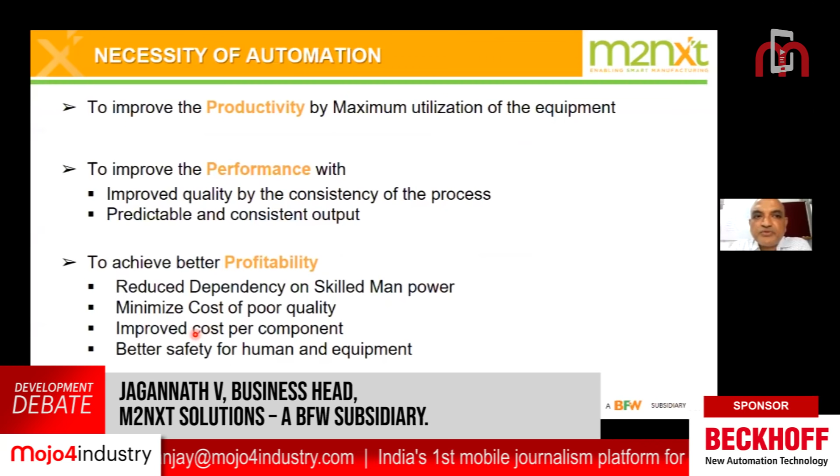So what is the real meaning and necessity of automation? The first and foremost is to improve productivity by maximum utilization of the equipment, so that the OEE of the equipment is at its peak, at its optimal level.

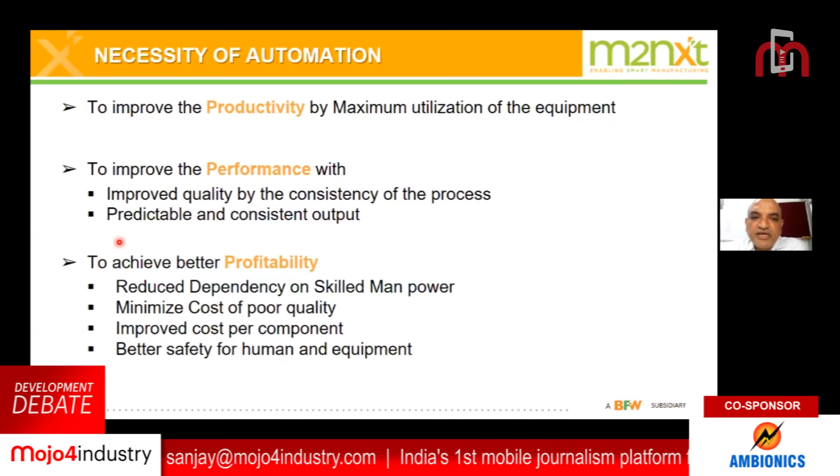Next is to improve performance with improved quality by consistency of the process, predictable and consistent output, so that you know for sure what the output would be, what you would get from the shop floor when you automate, so there is no ambiguity or surprises in terms of deliverables from the shop floor.

Third, as a result of productivity and performance, is to achieve better profitability, which means reduced dependency on skilled manpower, minimized cost of poor quality, improved cost per component, and better safety for human and equipment.

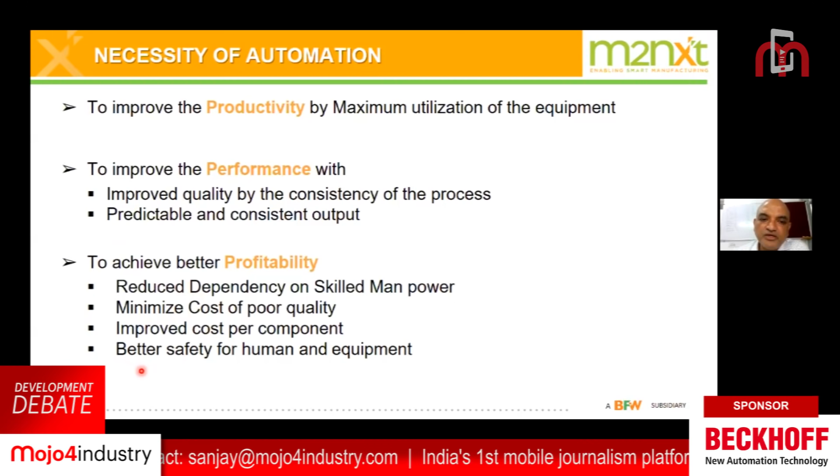Now, when we look at automation, what are the typical technologies which come in handy? A 6-axis robot, which most of you will be knowing, and a robot which can work with humans and equipment with full safety, called a collaborative robot, which we also call COBOT.

Then a gantry with 2-axis, 3-axis, and 4-axis, depending on the type of application and the kind of takt time and loading-unloading time. One could use a gantry, including for space constraints and existing layout limitations to modify, and so on. A SCARA robot for high-speed pick and place applications, something like 130, 140 picks per minute up to 180 picks per minute.

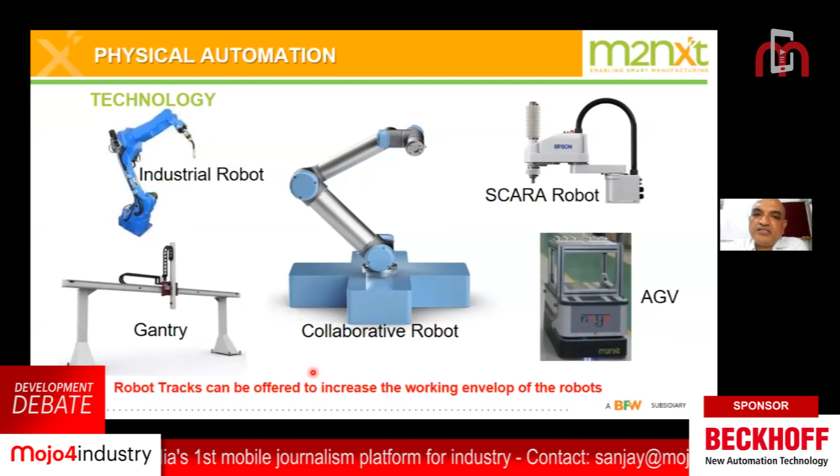And an AGV to move material from point A to point B to point C, and also on-demand change in route depending on the requirement on the shop floor, so that the AGV can autonomously take a different route based on demand. And of course, the work envelope of the robot can be increased by putting them on tracks, which gives a better benefit when the takt time is quite high, where a single robot could deliver to many machines, many equipment.

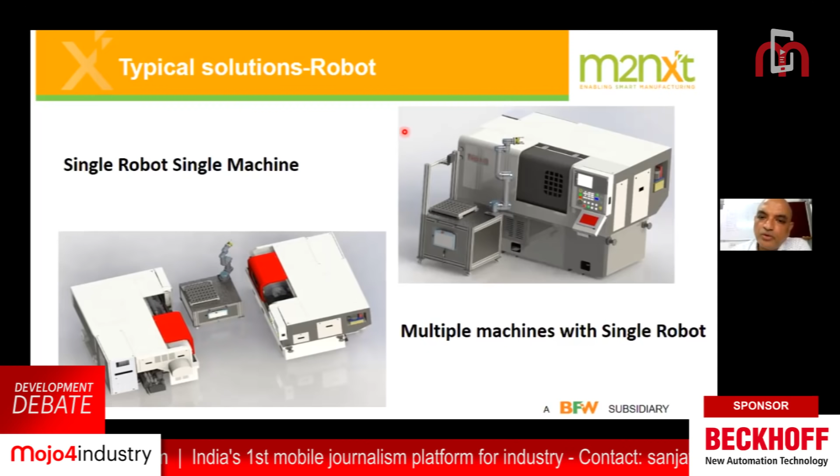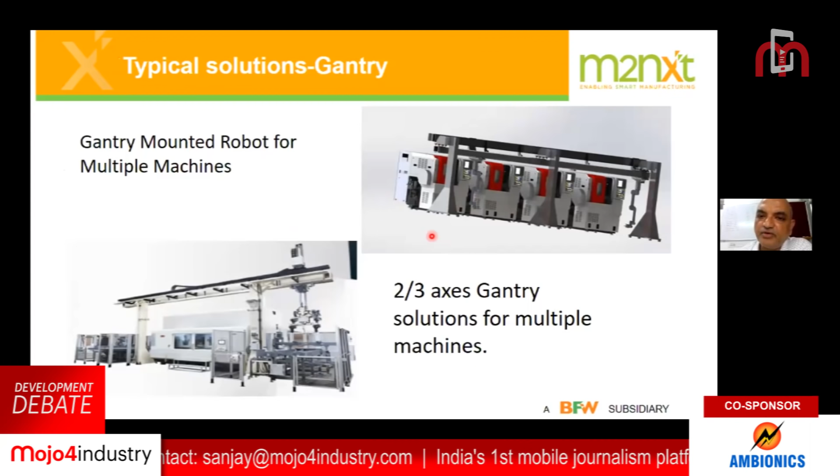Now, typical solutions in manufacturing: we can see a single robot working with one machine, and when you have a longer cycle time, two machines and one robot working. We are also looking at multiple machine tending where the footprint requirement is very tight, in an automotive kind of 60 jobs per hour, 80 jobs per hour requirement, where multiple machines are kept very close and positioning a robot could be very difficult.

A servo gantry would be used, which would make it possible for loading and unloading from the top, while you have very narrow space and still be able to achieve the cycle time. So typically one machine, different types of machines and a gantry, and identical types of machines and a gantry would definitely be possible to do.

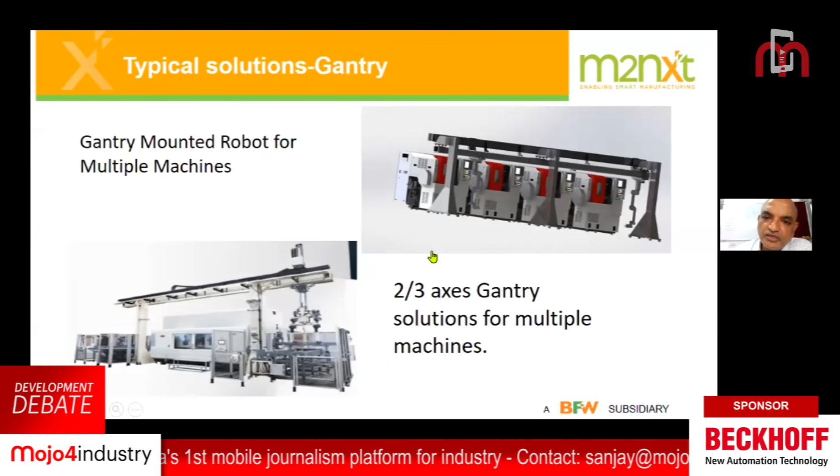These are the automation solutions we've traditionally been looking at all these days, which is also picking up quite dramatically. But what we are going to talk about today is really the digitalization convergence with automation, where there is a lot of intelligence which can be driven from the automation cell, which means it not only brings better productivity, but also gives a lot of information in terms of what exactly is happening in the cell.

Here, what we have done is we have used our data acquisition device, which is used for digitalization on a machine, also in an automation cell, which can not only talk to the machine but also communicate the data to the cloud and gather data from the sensors and the robot, and try to effectively give inference from the cell in terms of what exactly is happening in the automation cell, even for a person who is not sitting in the factory.

That's the kind of automation we are slowly moving towards from the traditional type I just spoke about. For example, there was a requirement of having a robot tending to 8 different machines, including automatic gauging, an input conveyor, and 16 variants of components to be machined in that cell, with automatic identification of these components coming into the cell dynamically.

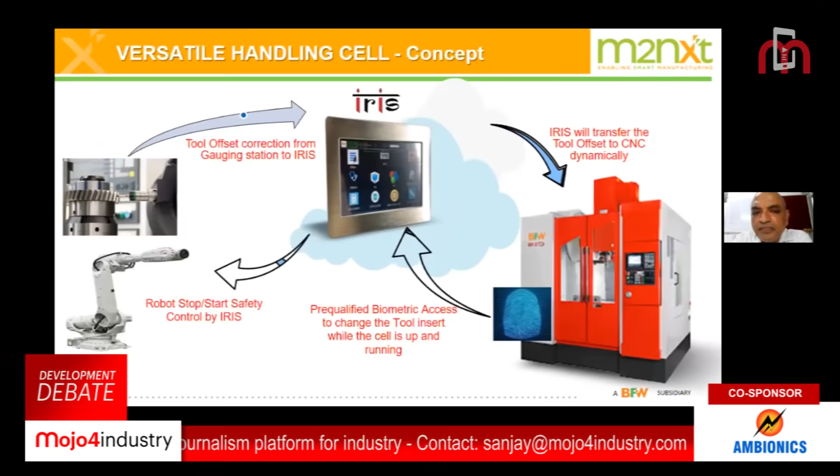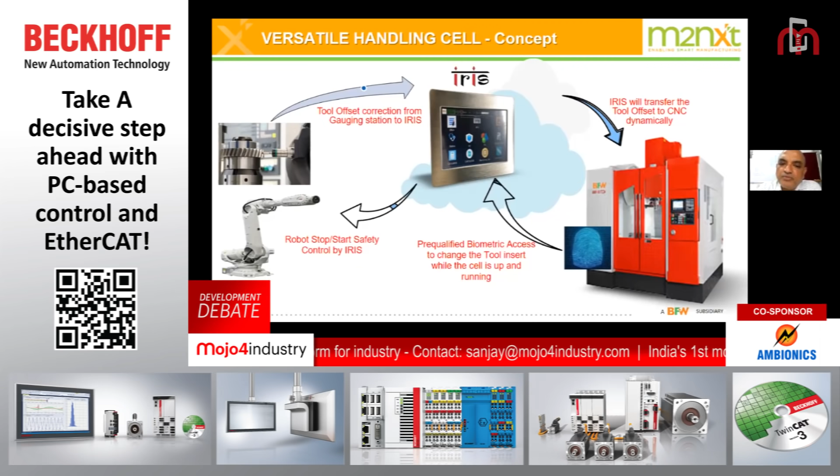The compensation of each machine, what is being machined and gauged, had to happen automatically on the tool offset. The output from the cell had to go into the pallet transfer, where automatically the forklift would come and lift. The entire demand from the cell was zero parts per million, and the data had to be available to the tier 1 customer sitting 15,000 miles away, who was able to see what kind of SPC, SQC analysis was achieved on the cell.

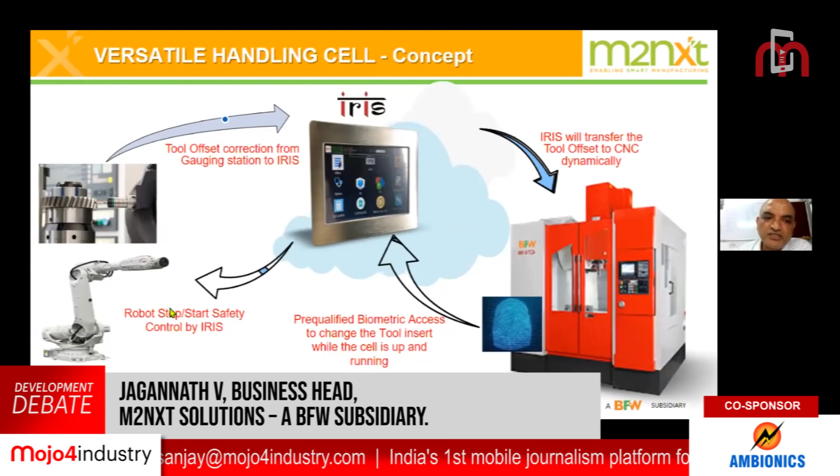Conceptually, the tool offset gauging correction happens to the machine through the data acquisition device. Entry and exit into the cell was controlled by a pre-qualified biometric access, which was pre-approved for people to enter the cell. The robot start and stop can be easily controlled by the data acquisition device.

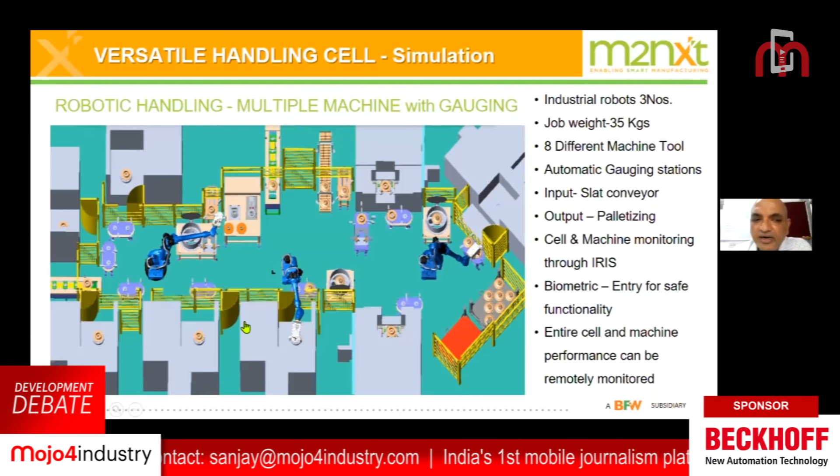So typical cell architecture is like this. There were 8 machines: 5 VTLs, 2 vertical machining centers, and 1 facing and centering SPM, with 3 robots, an input conveyor, and an automatic gauging station. The entire cell is unmanned, and the whole performance parameter of this cell can be viewed remotely, as long as one has access to this cell, without even going into the factory. This was the primary architecture of the cell.

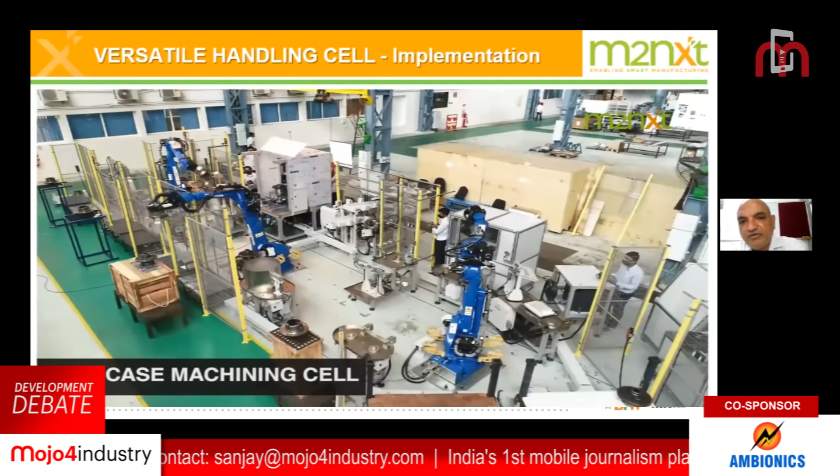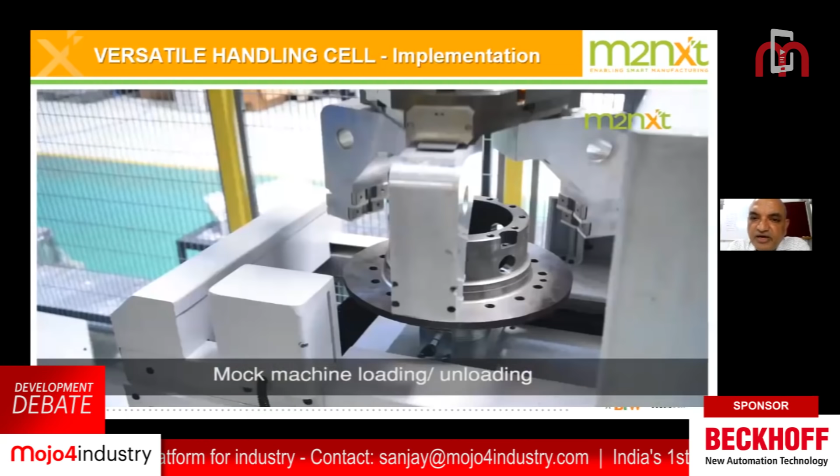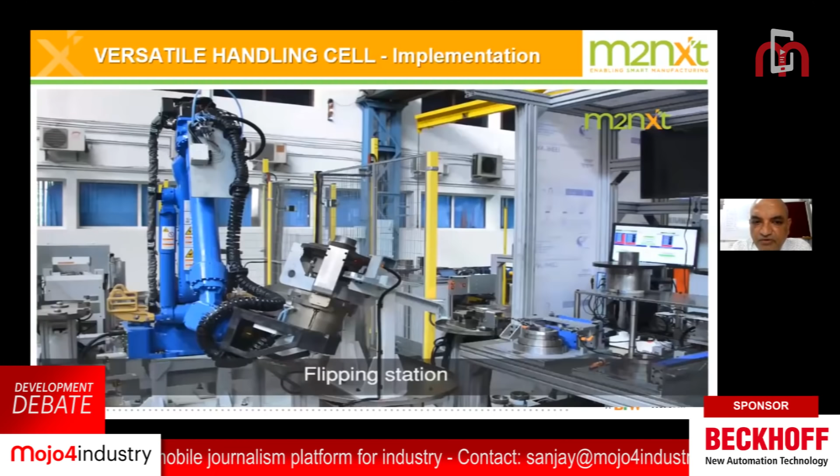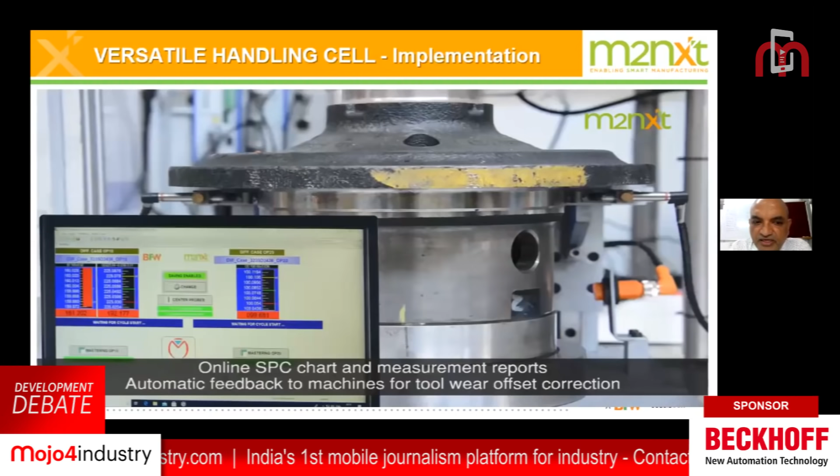This was the PDI, prior to dispatch inspection, done on our shop floor, which we have gathered here. So you won't find machines, but you will find the robot activity. Here you can see there is a flipping of the component, then next there is a cleaning. We are doing a part cleaning after it is loaded, so that there is no dust before the inspection happens after OP10.

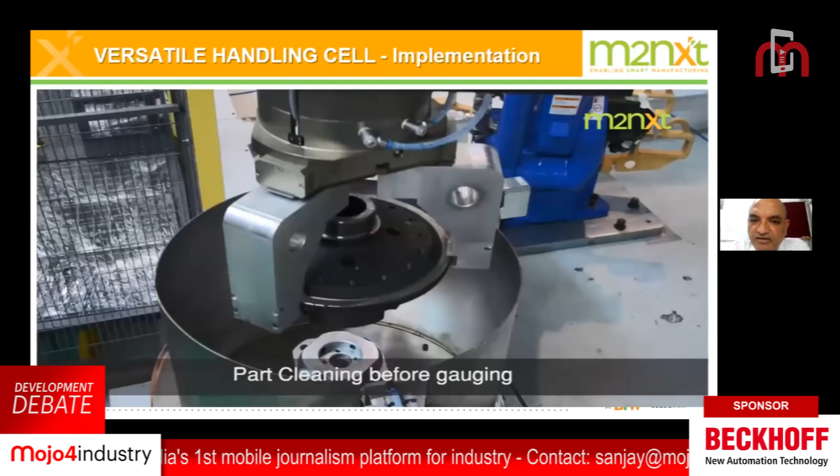Here there is an online inspection happening, and the data being gathered goes to the main server of the manufacturer, the customer, as OP10 results. Then OP20, which is the fifth machine, is being loaded, while the OP10 activity's gauging result and tool offset compensation is moved to that machine automatically. Again, part cleaning happens here automatically, and again gauging. So the entire cell runs automatically.

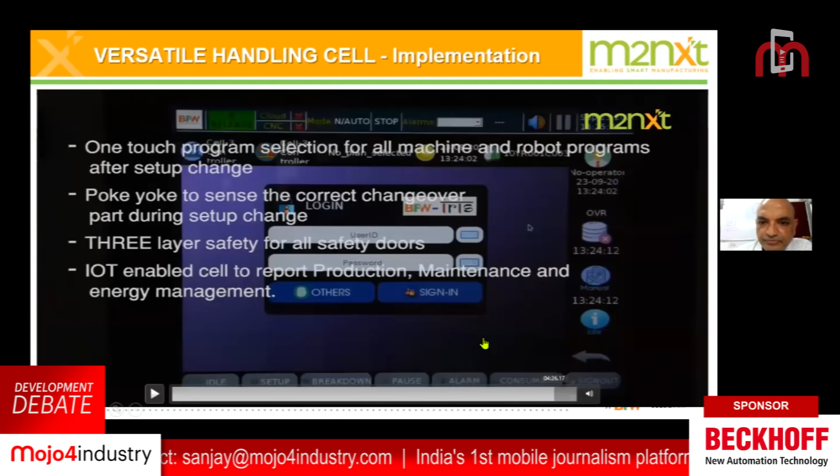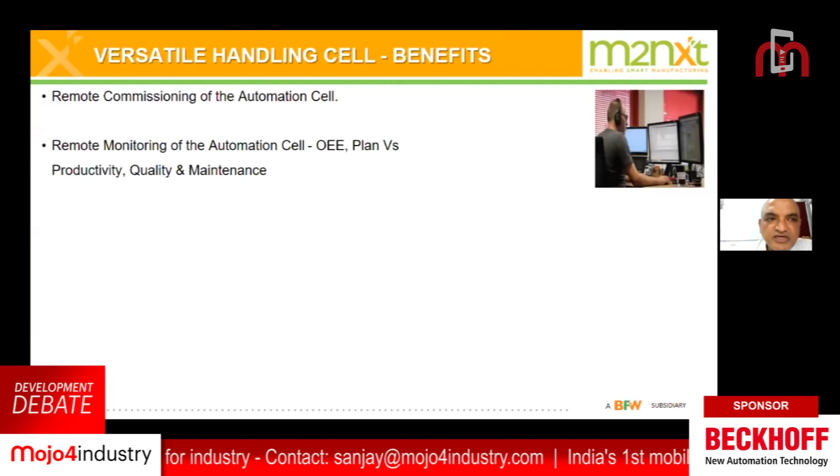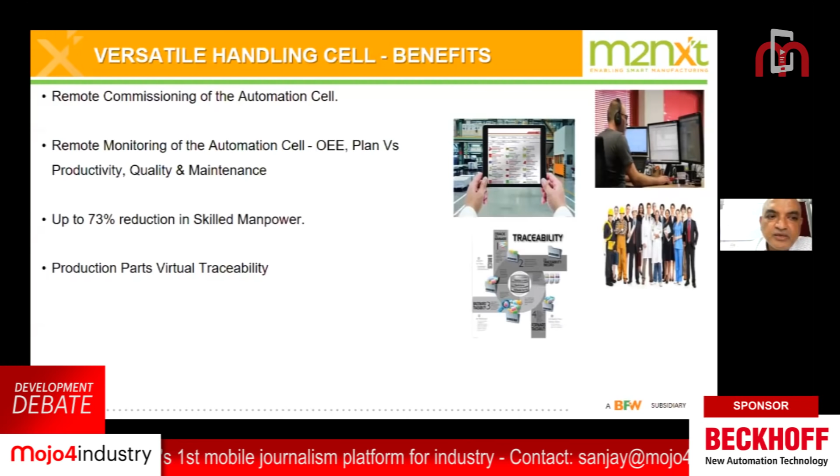What are the typical benefits? First is the remote commissioning of the automation cell itself, one can do a remote commission without having to go to the site. And remote monitoring of the automation cell, including OEE, plan versus productivity, quality, and maintenance. Up to 73% reduction in skilled manpower. Production parts virtual traceability, tool life management, auto tool offset, auto gauging, auto palletizing. Total safety for humans and equipment due to the biometric access achieved on the cell.

Now coming to the very interesting part, the return on investment. The overall investment cost of this cell was something like 1.76 crores. What we could witness is we could eliminate almost 73% of the operators, including their benefit, and the cycle time improved from manual operation to automatic operation. We witnessed an increase from 238 components to 320-328 components. If you guess something like 500 rupees per component as the increase in productivity, the return on investment straight away comes in 12 months.

So this is the kind of return on investment one could look at, provided the demand on the component is there for running it in 2 shifts or 3 shifts, and the variants should not change for the next 4 or 5 years.

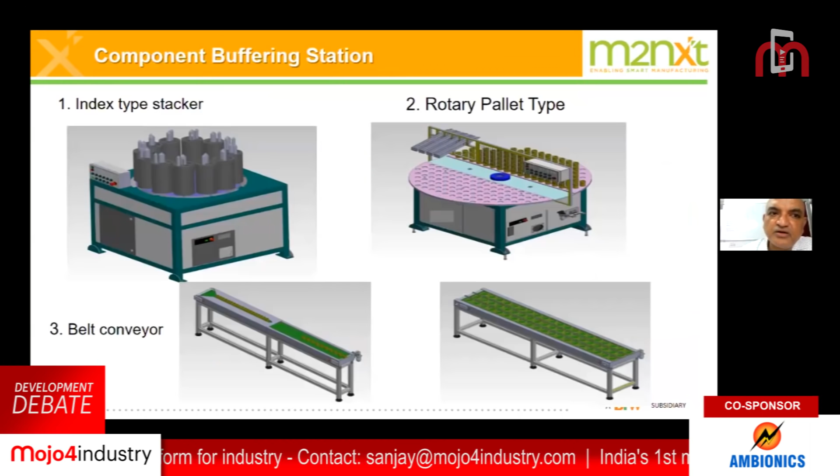That is how, as the value of the component in the supply chain becomes higher, your return on investment will be faster. A lot of buffer application for holding components like stacker, pallet type, belt conveyor, vibratory feeder, slat type, chain conveyor—different techniques depending on the requirement on the shop floor, including customization and cost performance, HMI and things like that can be handled.

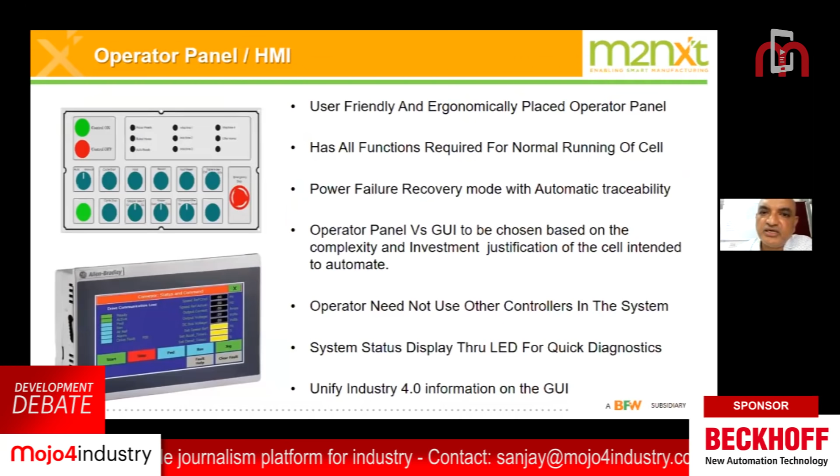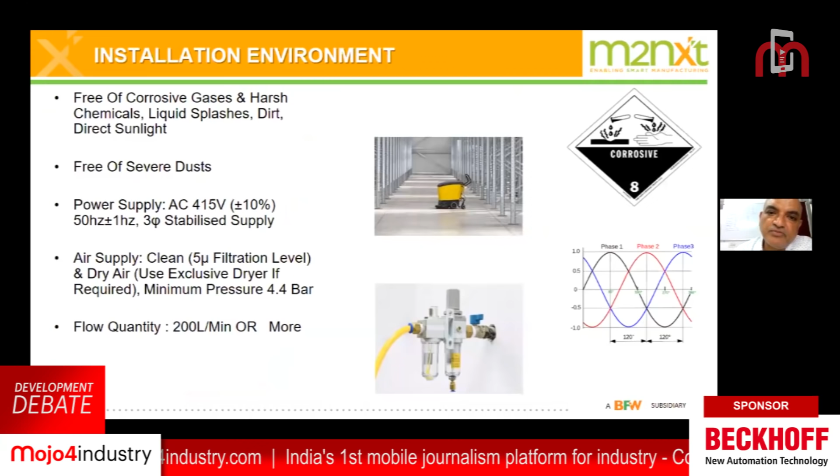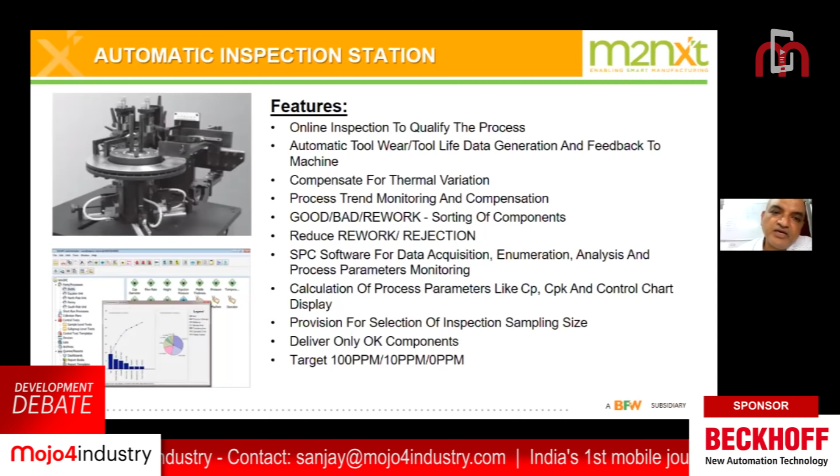Installation conditions favorable for running automation on the shop floor need to be met in order to have good reliability performance. And a gauging station starting from 100 parts per million to 0 parts per million needs to be achieved, and if you want to look at the statistical performance of the entire process, automatic online inspection is recommended.

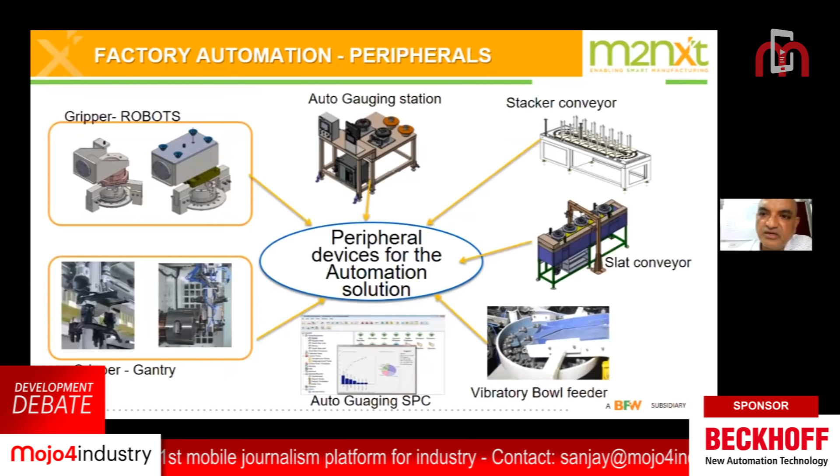So in order to have a good solution, you need to primarily focus on gripping systems, gauging systems, conveyor systems, and of course the HMI and the overall architecture.

So with this, I come to the end of my session. I just want to give this quote of Albert Einstein, where he said that the true sign of intelligence is not knowledge but imagination. It's very apt and clear for automation, where imagination is really going to give us a good part of implementing automation on a given shop floor, be it manufacturing or anywhere. So with that, I would like to end my presentation, and thank you for your attention.

Thank you so much, Mr. Jagannath. It was very well summed up, explaining how automation processes can help improve productivity. At the same time, you spoke about what kind of ROI a person or an entrepreneur can expect.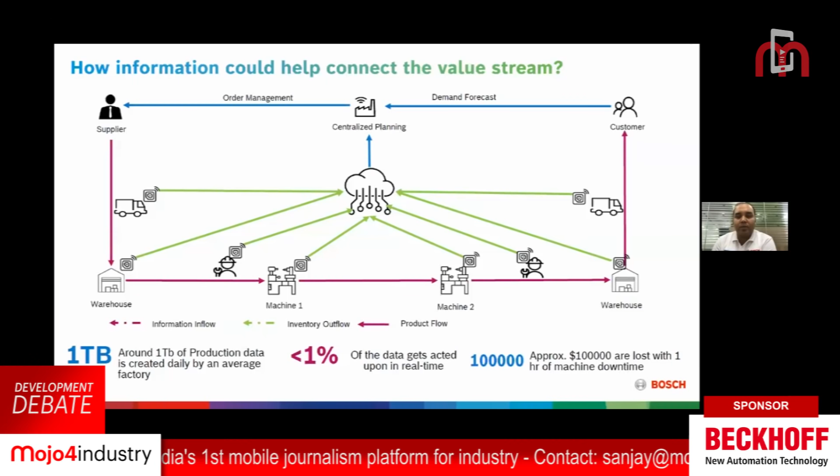So two basic things. One is, if you look at the way the entire supply chain is divided—from a supplier to a warehouse to a manufacturing setup where you have multiple machines, warehousing, and finally to your customers through inbound and outbound logistics—what we are lacking today in most of this value stream is the way we use data or information at different aspects of the value chain to make certain decisions in order to improve on the planning aspect.

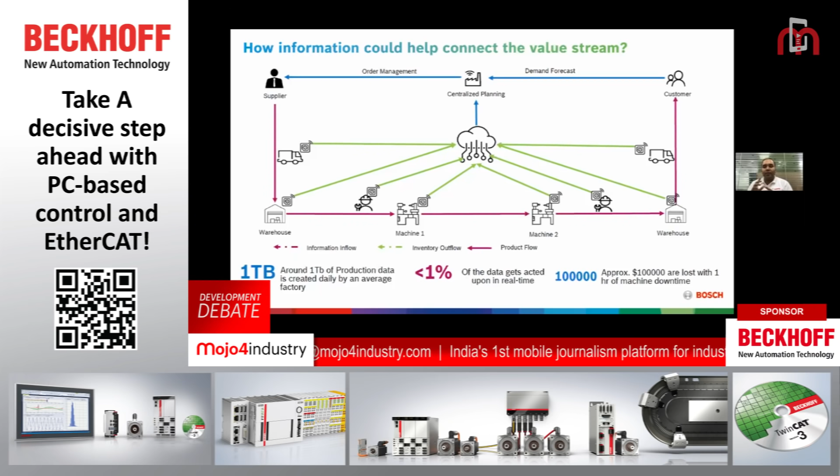So how we can leverage that data in order to make an optimal decision. When we do that, there is automatically an automation when it comes to capturing this data and the decision-making process. So my aim will be to move from physical and industrial automation to a realm of process and decision-making automation, which will help improve productivity.

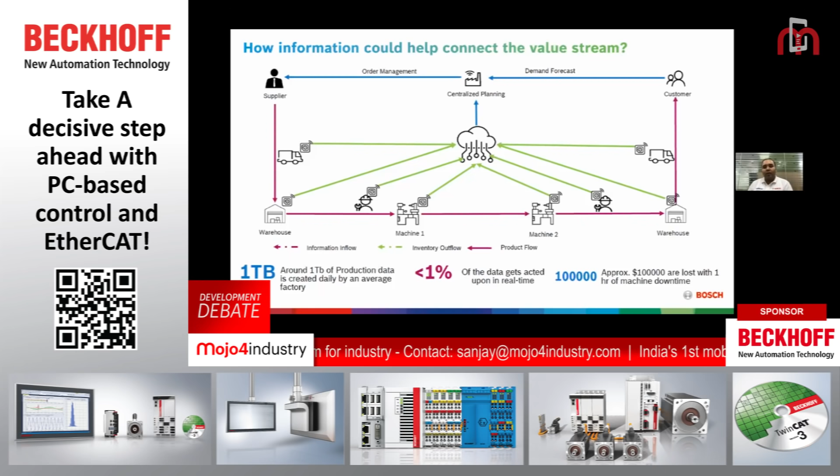There are a few facts which most of you working in this domain would be aware of—that currently there is a huge amount of production data being created on average by a factory, and more so India is also picking up in having a robust set of data captured at the OT layer, the operational technology layer, and then combining it with the IT layer, the information technology layer.

However, the fact remains that less than 1% of this data gets acted upon in real time. So while the data sits in servers, cloud, or on-premise, depending on your IT or data configuration or data lake setup, the sad reality is that most of the data is not available in real time to take decisions that directly improve and impact productivity.

There is another interesting fact that more than $100,000 are lost per hour of machine downtime. Hence, if there could be something that could be acted upon in real time, there will be huge value associated with it, both from efficiency as well as from the revenue side.

I wanted to break it down into simpler elements, saying how is productivity being measured in our parlance today in industrial manufacturing? Predominantly, it's the availability of my individual machine, the performance of the machine, which is nothing but your actual run rate versus the planned run rate. In combination, they give me overall equipment effectiveness.

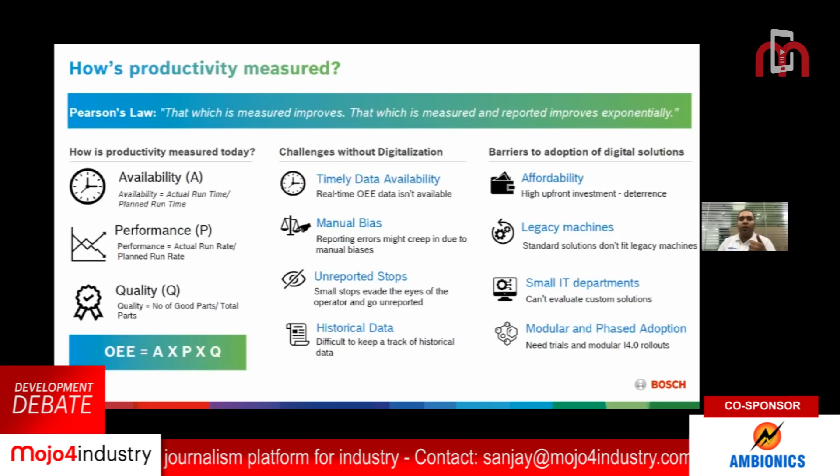Now this process of managing or measuring productivity itself is today not automated. Today most of it is being done manually. There's no digitalization or automation of this entire productivity measurement process, so there is no real-time OEE data available. If you want to make a decision on a shop floor basis, you don't have that information, and by the time you get it, it's already delayed.

Second, there are a lot of reporting errors that we found when we started getting deeper into understanding how the data related to machine productivity is captured. Then, of course, there are small stops which really evade the eyes of the operator, and they often go unreported.

The barriers that we found related to adoption: one is, of course, affordability, where most often there's a high upfront investment which acts as a deterrence to this automation. Second, we found that the standard solutions that exist for automating the entire process of collecting data for productivity improvement don't fit into your legacy machines, which are machines that do not have PLC or any such digitalization.

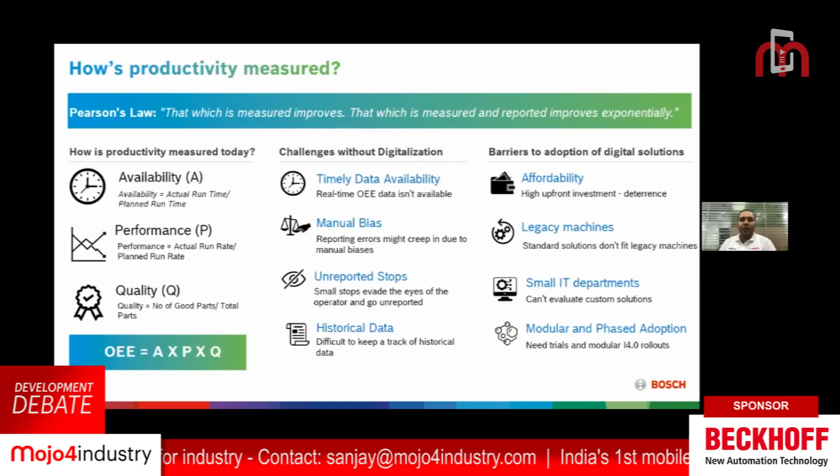Thirdly, most industrial manufacturing setups may have smaller IT departments which cannot evaluate a custom solution or build one on their own. And lastly, most of these implementations want to go via a modular and phased approach rather than a holistic or one-time approach of connecting all machines using all the data I showed earlier.

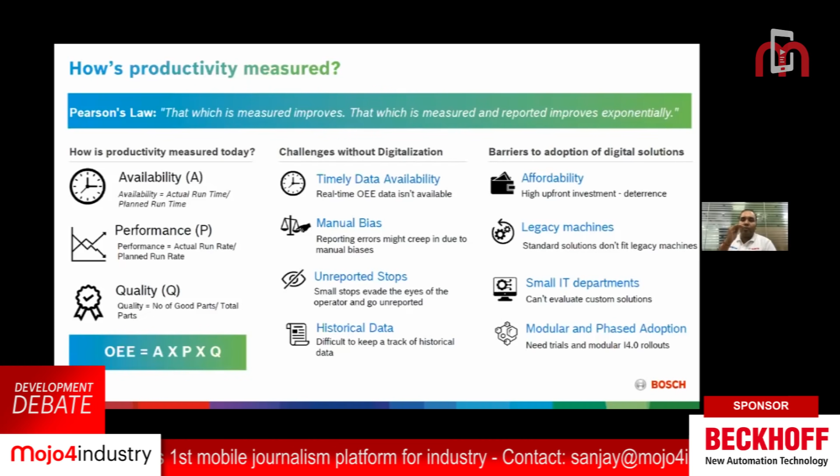Hence, it has to be a very pragmatic evaluation of how to automate the way productivity itself is measured, because that's the cornerstone of measuring and reporting productivity appropriately. In absence of it, all the business cases we talk about building to push on the productivity side often don't hold ground because of the lack of data. That is what I want to focus on when we talk about automation.

There is a kind of divergence when it comes to the requirement of different players in the ecosystem. The owner, predominantly the management or the promoter, has a very different view of what automation and productivity can yield. While the supervisor, who is in charge of the shop floor or a cell or a plant, typically has a different parameter or KPI that he or she is measured on. And the operator, someone working on an individual machine, has a completely different parameter.

So the first thing is to understand what is the base minimum that each of the stakeholders want when they talk about automation and productivity. We realized there are three basic things that are important. One, how can I make this data measurement available in real time? There is value that all three of them understand when it comes to real-time measurement of data.

Second, can I get additional information in terms of downtime, in terms of benchmarks related to how other companies, other industries are faring when it comes to OEE metrics? Thirdly, if there could be a real-time alert as well along with the data, which can enable a plant maintenance person, a machine maintenance person, an operator or a supervisor to really act upon it to reduce the number of hours a machine spends on downtime.